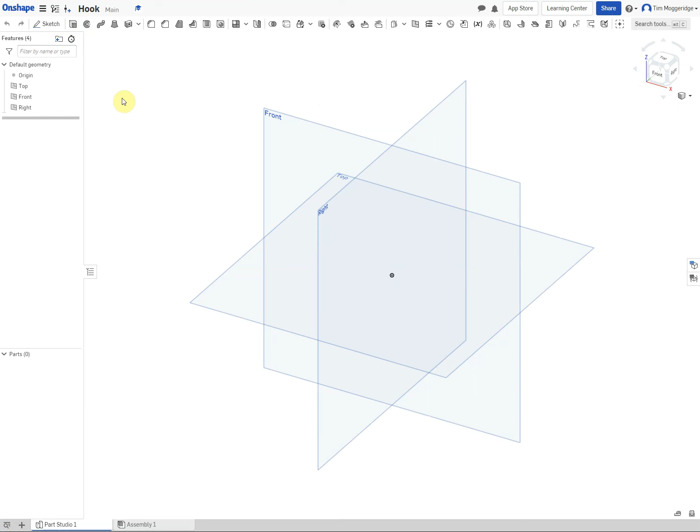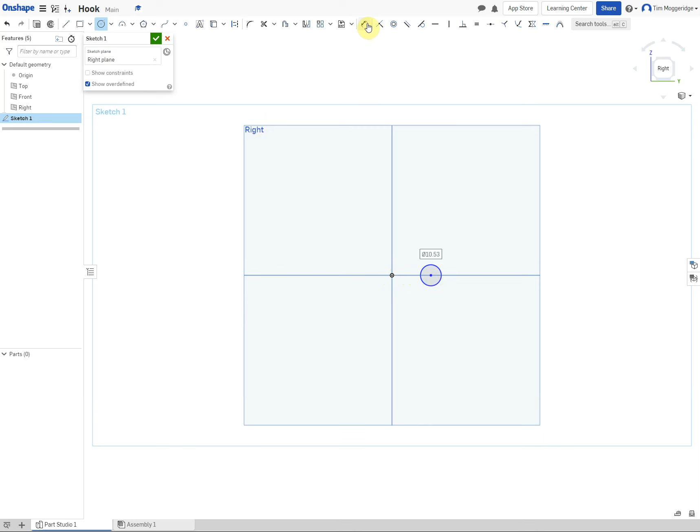So we're going to start off creating a sketch on the right work plane. Right click, new sketch, right click, view normal to sketch plane. I'm going to start off with a circle, and draw it to the right of the origin, drag it out, and then dimension it. I want the diameter to be 2 millimeters, and from the origin to the center of the circle I want it to be 6.5 millimeters. And that's it, that's all there is to that sketch.

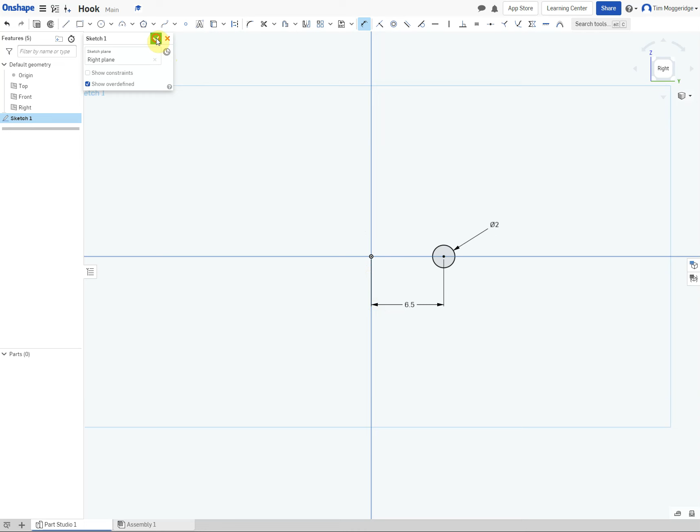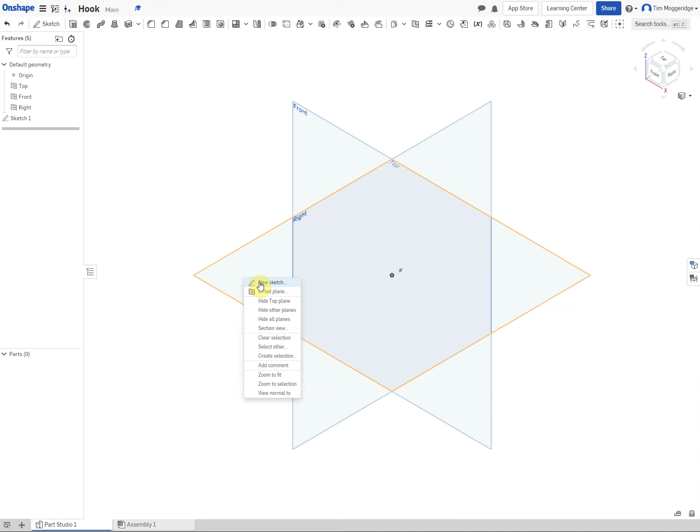Our next sketch is going to be on the top work plane. So right click, new sketch, right click, view normal to sketch plane. If I zoom in, you can just about see our sketches there.

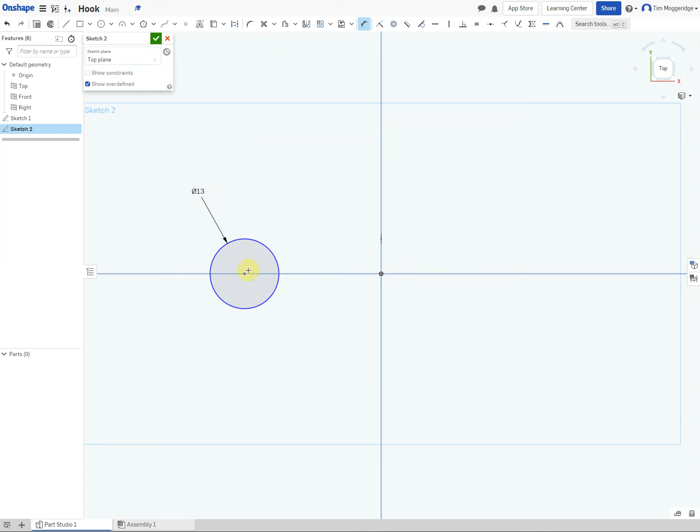Again, I'm going to use a center point circle. I'm going to come over to the left of the origin, draw a circle, and dimension that. Now the diameter of this one is going to be 13 millimeters, and from the center of the circle to the origin it's going to be 30 millimeters.

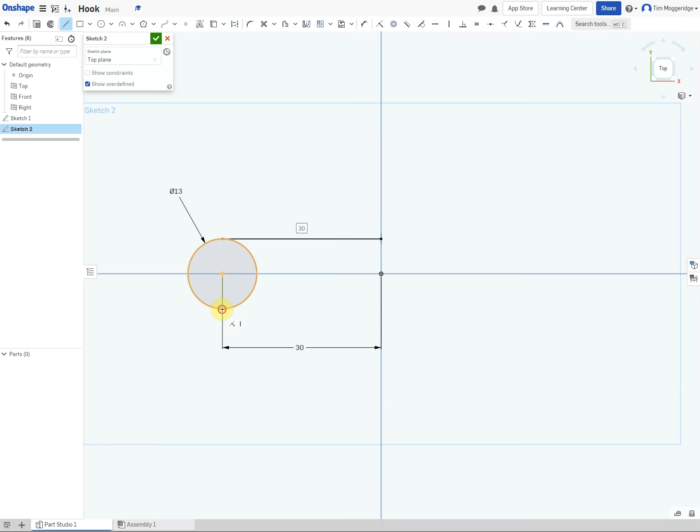I'm now going to use the line tool, and I'm going to hover over the center of the circle and go out to make sure that I get it at the 12 o'clock position, and drag a line out until it lines up with the origin. You'll notice that's pierced the center of our other sketch. I'm going to do the same on the other side, making sure I'm lining up with the center of the circle, then ending the line lining up with the origin or the edge of this work plane. Finally, I'm going to use the trim tool to cut away that half of the circle, and I'm now going to exit that sketch.

So I'm just going to manipulate that round using the right mouse button. You can see both sketches are grayed out because we haven't got an active sketch at the moment.

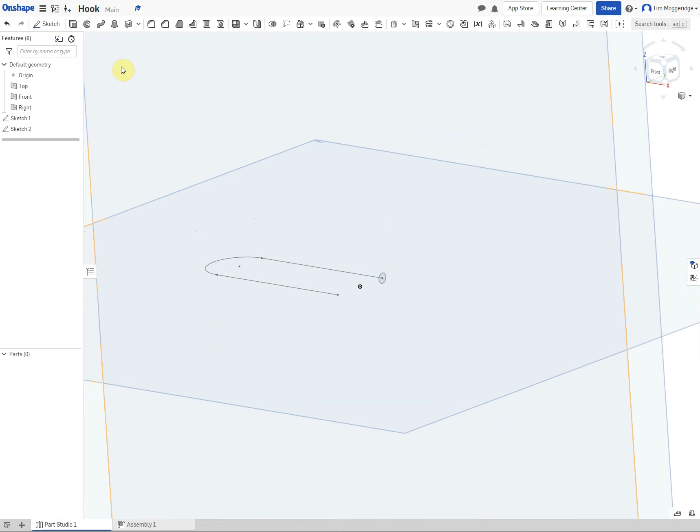We're going to use the sweep tool. So we need to select the face of the sketch to sweep, that's going to be sketch 1, and we need a sweep path, that's going to be sketch 2. You can see that it's taken our circle and swept it along that other sketch to create a solid part. Click the tick, we're happy with that.

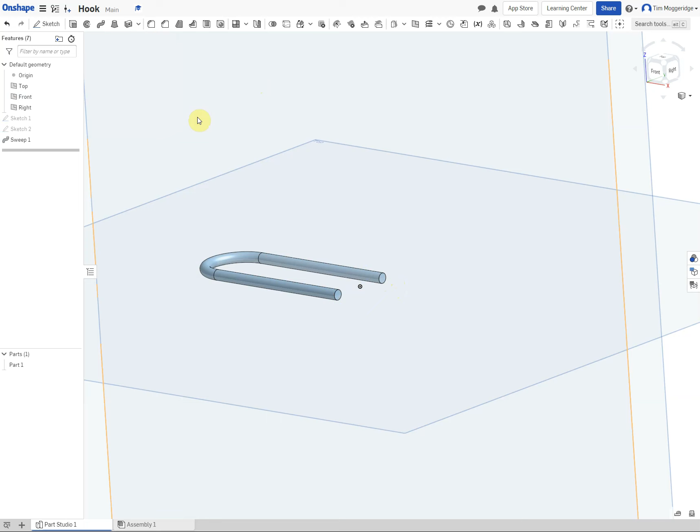We're now going to draw our next sketch on the front work plane. So far, our component represents a bit of round wire that's been bent into a U shape to create a hook.

Right click on the front plane, select new sketch, right click, view normal to sketch work plane, and we're going to zoom in to the end that's near the origin.

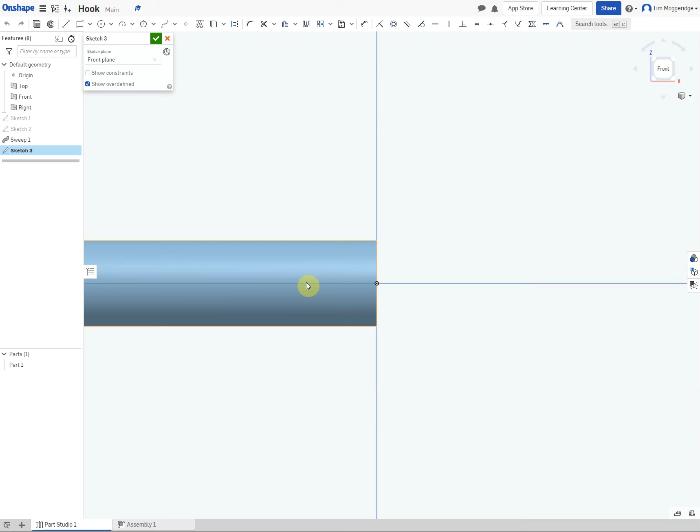Now to stop that from slipping out, what usually happens is part of that wire would be compressed, making it a bit narrower, but then spread out sideways. So first of all, we're going to do a cut to make it look like it's been compressed.

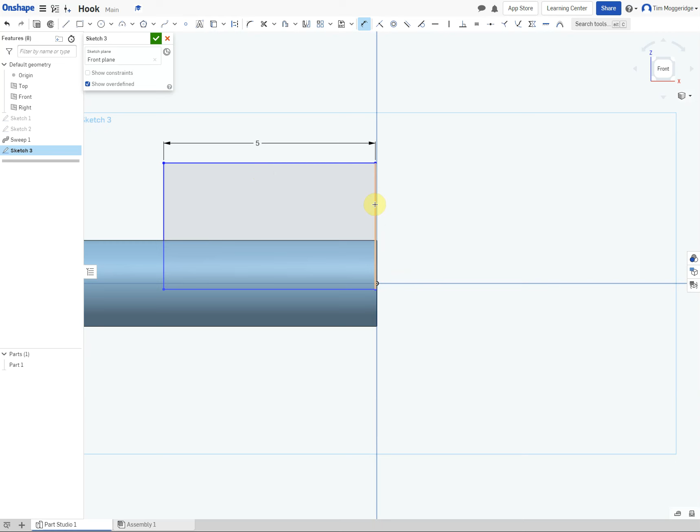So I'm going to use the corner rectangle tool, and drag out a rectangle close to this end, which I will now dimension. I want the length of the rectangle to be 5 millimeters, and the distance from the end to this line to be 1 millimeter. Now remember, if it's pulled the rectangle over the other side of the line, if this line was over here, I could type in -1 and it would send it the other way.

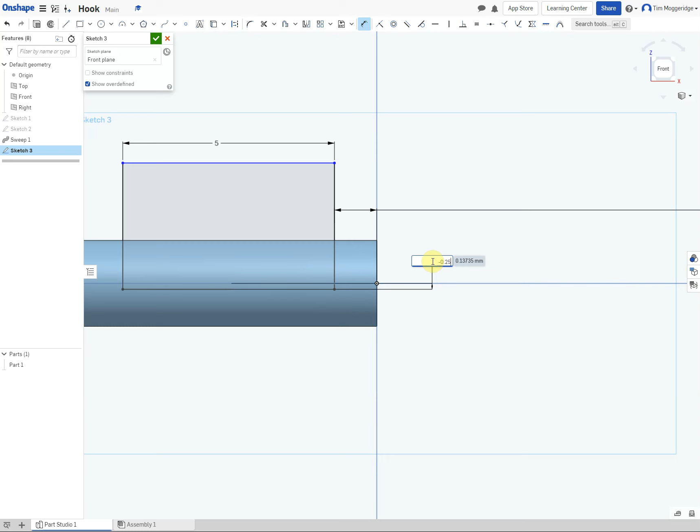I want from the work plane here to that line to be 0.25, and I do want it above the line, so if I type in -0.25 and hit enter, it puts it above the line. That's how the minus can work on the dimensions.

It doesn't matter how high this rectangle is, because I'm just going to use it to cut out a slot. So I'm going to go to the Features tool. Let's go to the isometric view so you can see how this works, and you can see that sketch is in the middle.

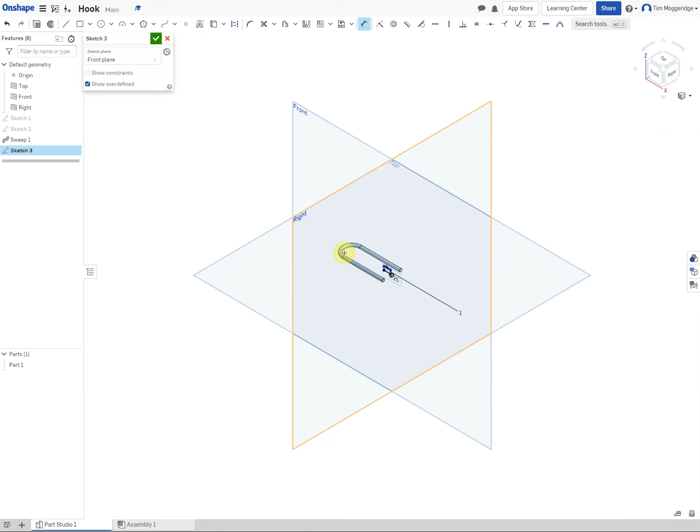If I go to Extrude and Remove, and go through all, it goes off in one direction and removes all the material. So I want to go second end position, and make that one through all as well. Click the tick, and if I zoom in, you can see it's cut out a bit of material.

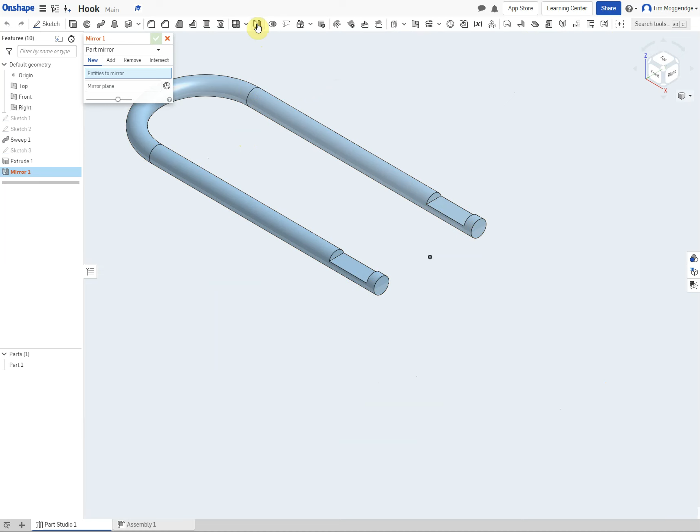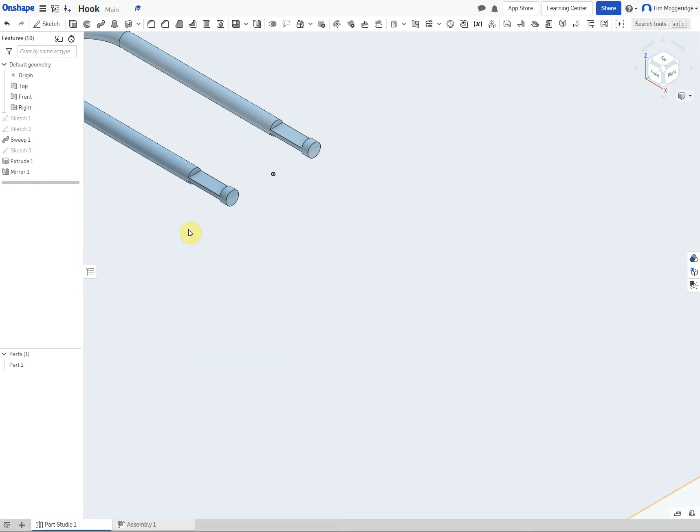I want to do the same underneath, so I'm going to use the mirror tool, change part mirror to feature mirror, then extrude one. Mirror plane is going to be the top work plane, so I'll select that, click on the top work plane, click the tick. If we zoom back in and move it around, you can see it's done that.

I now want to create a sketch on this surface here. So select the surface, right click, new sketch. And I want to view normal to the sketch work plane, and zoom in so I can see what's going on.

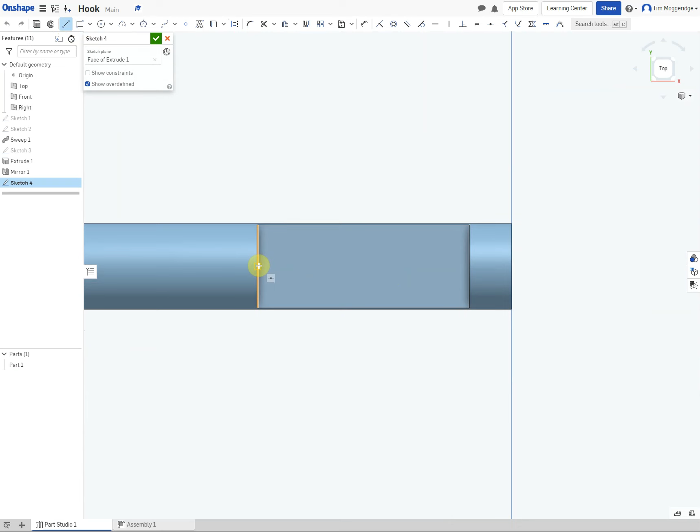I'm going to start off with the line tool, making sure it snaps to the middle of the left hand edge and snaps to the middle of the right hand edge. I also want to snap to the corner, from that line to the corner. If I zoom in, you can see it's snapped there on this corner. That's going to be important in a moment.

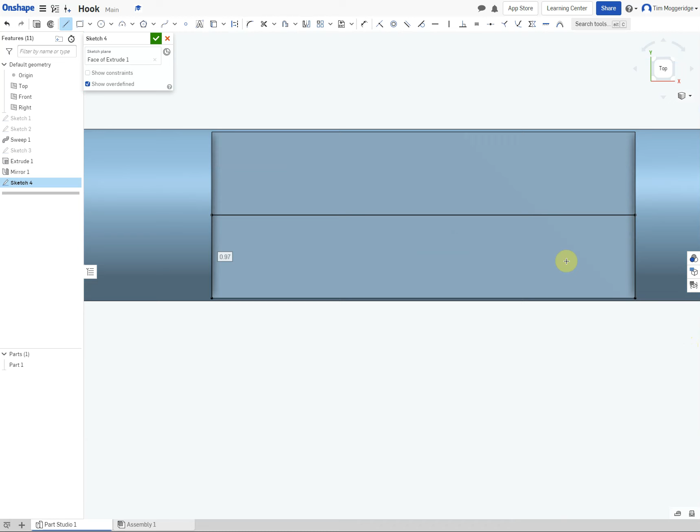I'm now going to add in a center circle, making sure the center is over here somewhere, but lining it up with the middle of this line. So I select the middle of this line, hover up, you can see the dotted orange line, and drag out a circle.

I'm not going to dimension the diameter, but I'm going to make sure that the circumference of the circle snaps to that line that I've drawn there. I could snap it to that line as well - it should be snapped to both.

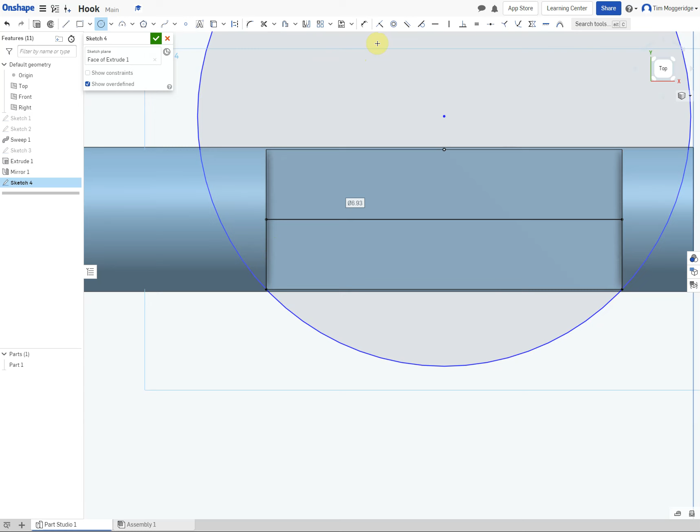I'm going to use the dimension tool now to measure from this line to the center of the circle, and I want that to be 2.5 millimeters. You can see it's moved the circle over, it's changed the relationship there, but the circle's still snapped to those lines.

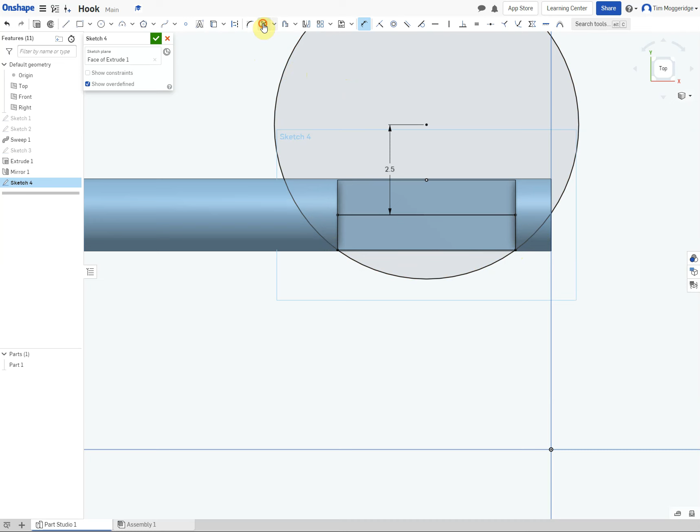I'm now going to trim off the bit of the circle that I don't want. So using the trim tool, I'm going to trim that away.

Now I want to have the same effect over here. To save drawing it, I'm going to mirror those entities. Because I'm in a sketch, if I go mirror, it wants me to select a mirror line, which is the line that I drew just now, and then it automatically wants me to go onto the entities. So I'm going to pick that line, the curve, another line. So I've now got my shape.

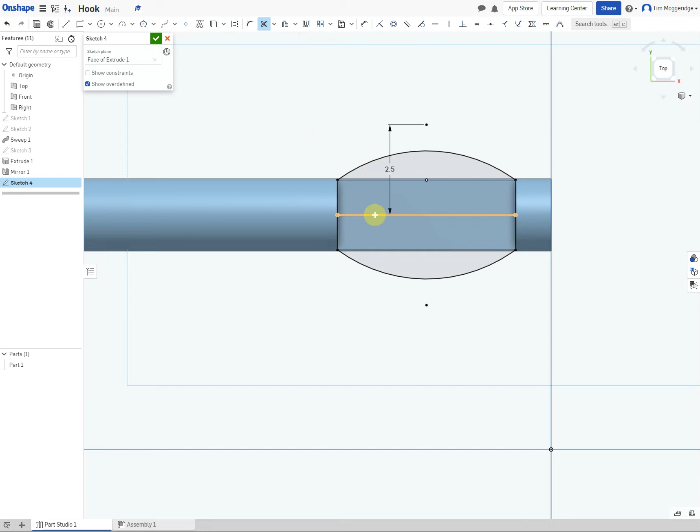I'm now going to trim the mirror line, and I have my shape there. So if I use the right mouse button to come down, what I want to do now is extrude that shape. So feature, I'm going to add material in.

I want the distance to be the other direction, but I'm going to just pick an end requirement of up to face, and then pick that face. So it's changed the direction and filled it in.

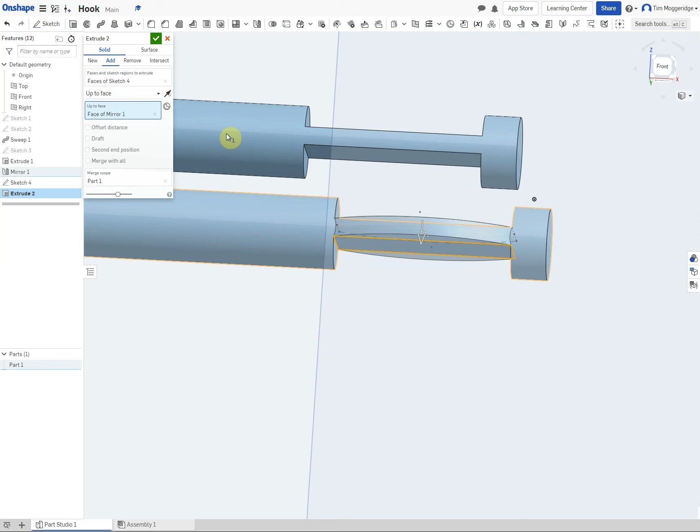If I click on the tick and move around, you can see that we've got a slightly squashed shape. As I said, that represents this round bit of bar being compressed in that area and the material being removed from here and squished out there. There would be a little bit of a radius in there, but we don't need to worry about modelling that.

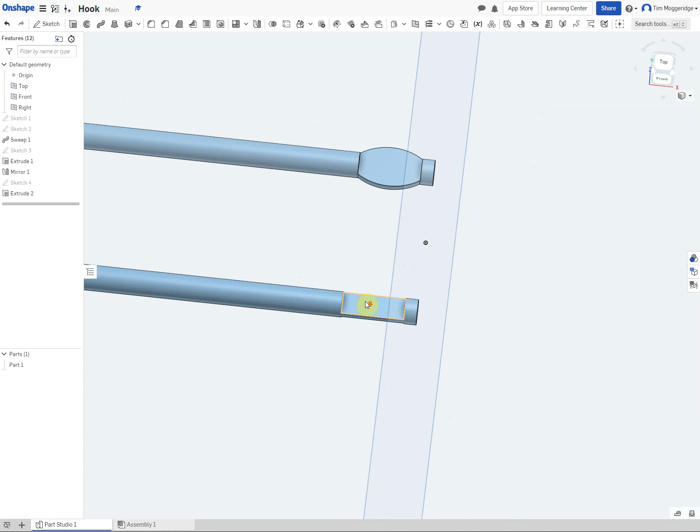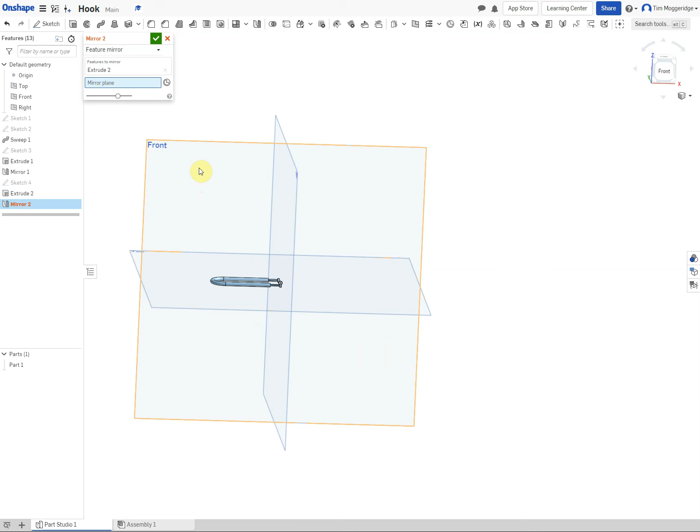Now I need to do the same over here. We could remodel that, but let's use the mirror tool. So you don't want an entity, you want a feature to mirror, and we want to mirror that. So we want Extrude 2 to mirror, and the mirror plane - we've zoomed out so that we can see the front work plane. Click the tick.

And we just maneuver that around. You can see now it's mirrored over there. And that's the hook created.